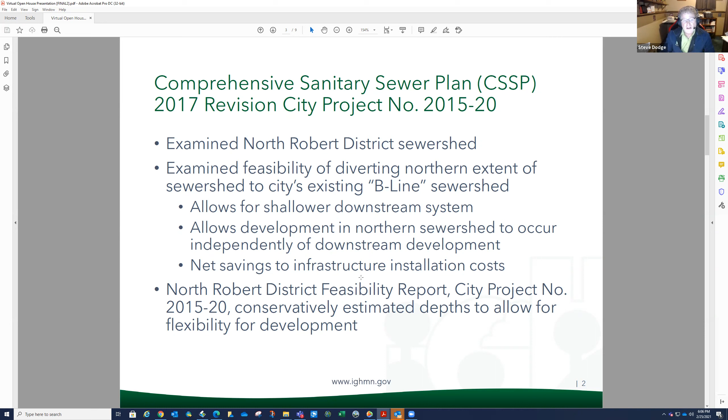So here is the before and after 2017 comprehensive sewer plan. Before, if I take my hand—I'll zoom in a little bit to help with the visual. So we have 70th Street down at the bottom where my hand is. We have Robert Trail on the west side. You can see the sewer before 2017 extended all the way north up to Dickman Lake and in the areas shown here, all the way to Babcock Trail.

After the option B revision of the sewer system, this sends the Dickman Lake area and areas north of 65th Street to the east, connecting to Babcock Trail and the 63rd Street B-line sewer. So it's a different sewer system, and that allowed the area to the south here to be disconnected now, so it can be a shallower system and provide benefit.

Now, this was all done before any finalized development plans were coming into this area, so the depths were very conservative in order to make sure there were future options as development occurs.

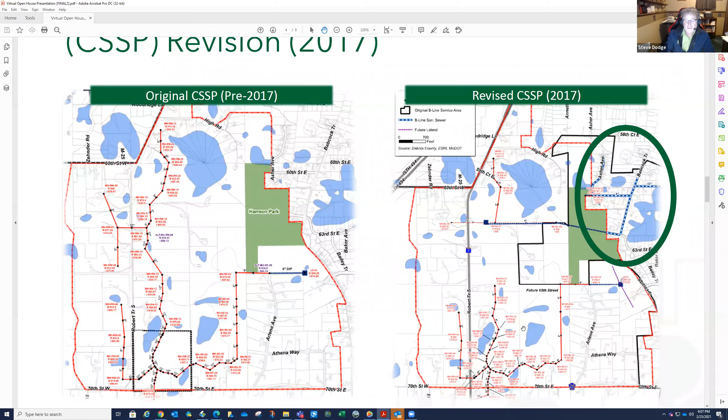Excuse me while I zoom back out. So now we come to this current review—this is a similar map, but zooming in on the southern portion of the maps we just looked at. This is Robert Trail, this is 70th Street, and the yellow down here in the corner is where the roundabout is for Trunk Highway 3, and the gas station is south of here.

But in the northeast quarter here is the Canvas at IGH Development. That's the spur of this review, refinement of the system, because we're starting to get development proposals in, and we can better determine, based on that, what the trunk sewer depths can be.

So I worked with Bolton and Menk, and we put together a technical memorandum based on the submittals we've gotten from Canvas at IGH Development in fall of last year, and presented it to the council on January 25th. They received it, and it acknowledged that we are implementing the 2017 revised CSSP.

That was option B, to send the area north of here to the east to the Babcock Trail area. This area we're looking at now is going to be refined based on current development submittals.

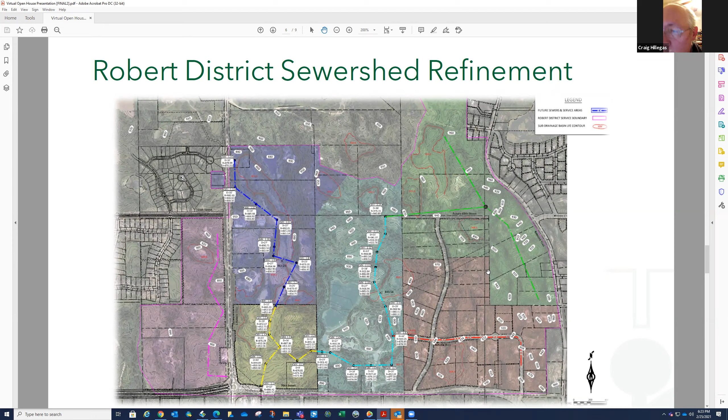I appreciate you guys doing this, understanding this is futuristic, but when you look at the Northwest area, there's a lot of different topologies and variances in land. Not only will you need a lift station where it's shown now in Fee's area, but at the northern end of the pink area on the right-hand side, those properties are way lower than the street and way lower than Babcock. Those last three on the top in the pink would also need one, since those topologies are probably 100 feet below street, maybe a little less.

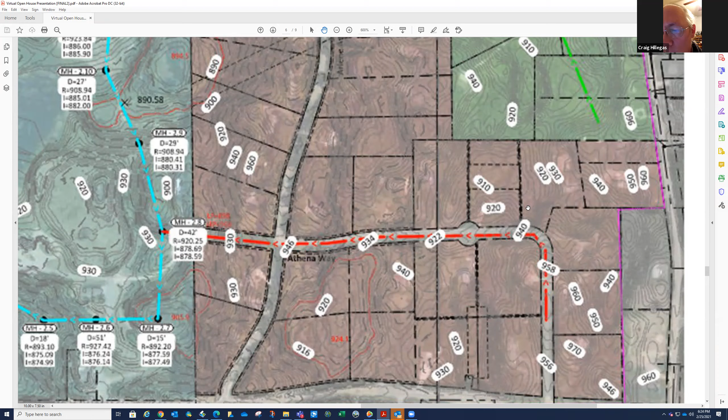The other thing I'm looking at is, I know you need to plan for future development, but in the light blue area you've listed the 79 acres behind us. Do you have development requests for that area? Because at one of the last meetings, Jason mentioned when we were talking about 65th Street that he was very opposed to even putting 65th through, as we know that's something for the future. I'm just wondering, are there current plans for development of that area?

Thank you for your question, Craig, and thanks for participating. I'm very excited that we have the landowner participation we have for this area, because it's really important we get your feedback.

Craig, as far as development goes, Tom Fee mentioned that further north he's developing a single family home unit right up in this area, and he's trying to protect some area, is my understanding. Tom Kaldunsky, the city engineer, mostly worked with Tom in that area. Personally, I'll have to get back to you on any development pressure.

I think you're talking about this green area, Craig, is that the area? No, it's the area between Arlene and Robert, in the light blue sewer line that you have—the old Claddock place, I think. Oh, you're talking about this area, the old Claddock place.

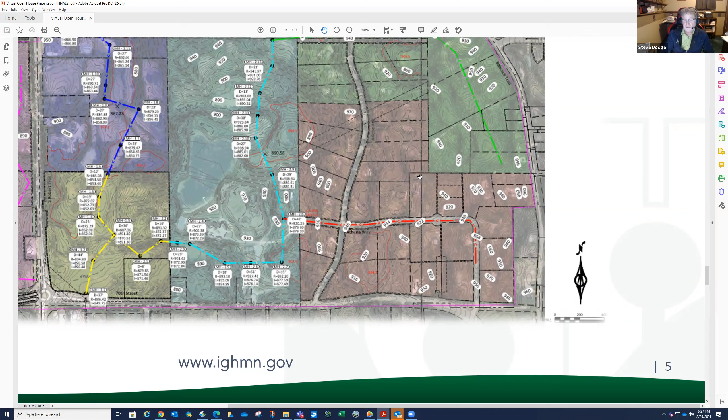Does that answer your questions, Craig? Yes, it does.

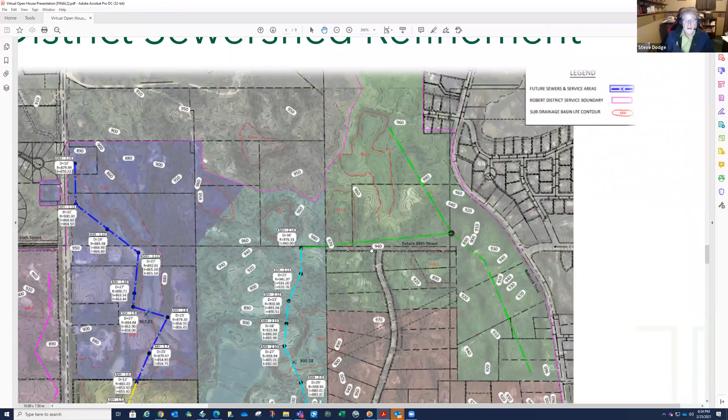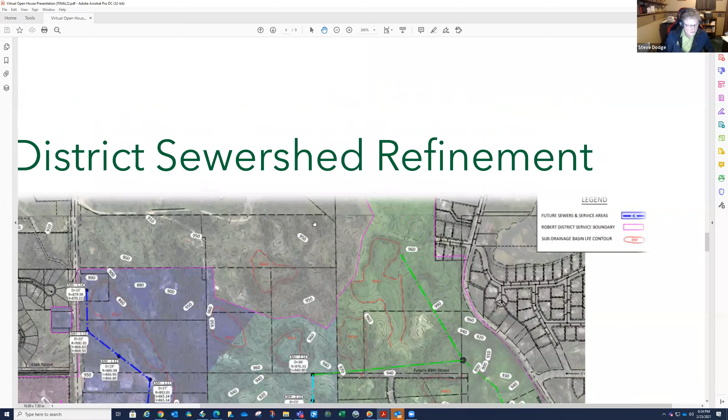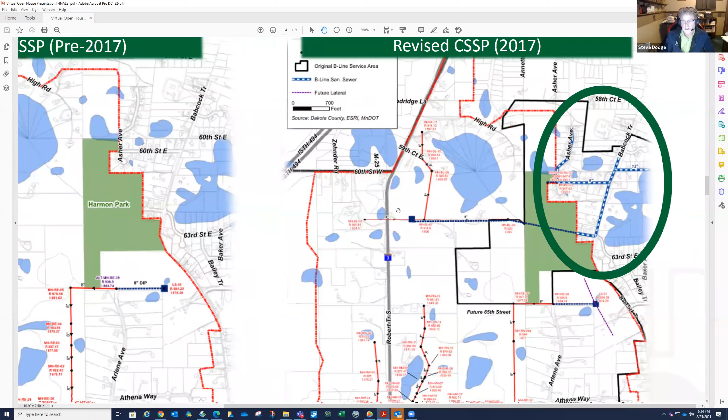Yes, Harmon Park is not to be developed. Let me go back to the prior diagram. Harmon Park is not projected to be developed. The only thing we have is the 65th Street alignment on the very border here that needs to go through, whatever that final alignment looks like, working with the Tom Fee property up here.

For the B line, the northern option is on 58th Court, right off of Babcock down here. There's a cul-de-sac within this big circle here, where my hand is, at 58th Court.

We've already installed a water main that goes across Harmon Park, all the way to Trunk Highway 3, then down Robert, connecting through the current developments of Blackstone through this area, and all the way down to 70th and Egan. This water main is already in because we needed this secondary water main loop to service this whole area. So the water main trunk system is in place now, with feeds from the north and also from the south, going all the way down to 80th Street.

So now the sanitary sewer system would show the same connection point at 63rd Street, but all we would do is bring a shallow force main through Harmon Park, just like we did with the water main, which is only 8 feet deep.

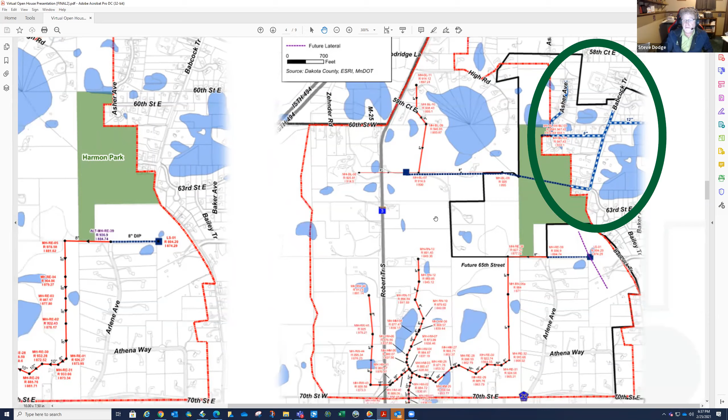So Steve, if I could do a continuance, this is Tom Fee. If you go forward to one of the other maps that showed the line, the green line going through our property, please. I think it's an interesting question posed by Michael, but you're saying that the green line connects through the M&E property, the old Kratitz property, pumping sewer from the southeast to the northwest, and then from east to west. But then there's this line that goes through the center part of our property and dead ends into Harmon Park. Eric and I talked about this a bit, but you have this line going through a park, even though you've already indicated the green line has to go east to west to connect down to Robert and 70th.

Yet you've got this dotted line that dead ends in a park, which creates a question mark around intention when you draw this. Now, I really believe from my conversations with Eric that that's going to go away, but it poses some questions, and it's informative to what you just got done saying about the water lines, which we get. We know that Loch Gregor, which is this 50 acres south of Dickman Lake and north of the Chris property and the Nichols property, is going to go to the B line. But why in the world would you even demonstrate a sewer line going north of a pump station that shouldn't be there in the first place, into the middle of a park? I'm not trying to create some deep scenarios here, but it does.

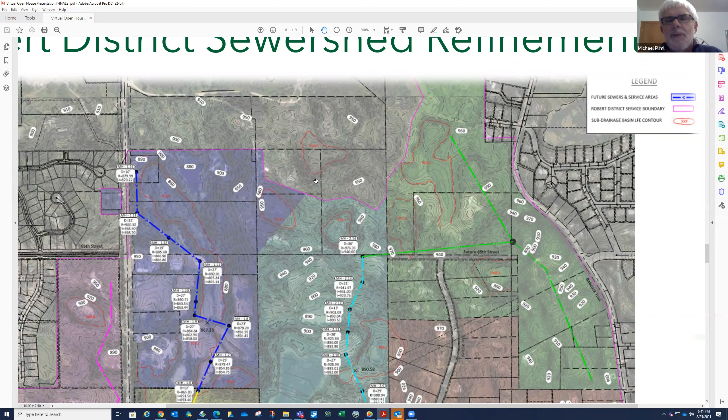Thank you. You bet. Also, Steve, to clarify, is that small property owned by the city across from the golf course going to affect anything in our area on Athena, that red area? They're two separate items. Is that true? That's my understanding, this is Michael Piml asking the question. Yes, that's my understanding, that the Rexigo parcels and the city parcel have the opportunity to be served from the south. Okay, thank you, that's my understanding.

Any other questions?

Yeah, I had another one here in the chat, Steve. Let's see. Oh, it's another question from Michael, but I think we kind of talked about that. I'm on Athena, and I would like a guesstimate on when sewer may be required.

And Steve, it sounded like you kind of answered that it's probably required at a time when it's petitioned by the residents. Yeah, we're not requiring this. Yeah, exactly.

All right. Are there any other questions? This has been a good conversation. There are some revisions that are going to come out of this open house meeting, which is the point behind having them, to do some further refinement of the diagrams. So showing without conflict, that's the main thing. The Harmon Park is a really good example. So those are the kind of things we'll shake out when we show lines on paper. So I appreciate everyone's feedback. Thank you for holding the meeting.

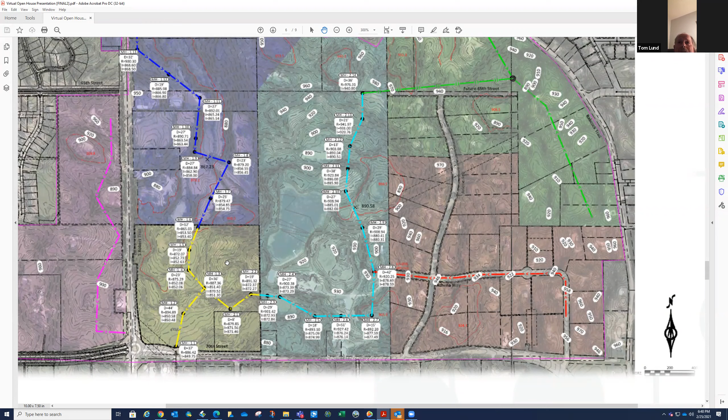Yeah, Steve, I appreciate that, and Eric, the same thing. But I'm just kind of shocked by it. And sometimes, no offense, but I think sometimes the city doesn't offer this because I really believe this sometimes - it's like you're not offering it because you're keeping the residents in the dark. I really do feel that way sometimes. Not saying that's the case, but I do feel that way at times, because there's so much, like these numbers that you guys present on this what we're talking about.

I already explained it. Who in the heck can understand? You start off with the top one, M. What is it? I can't. It's even hard to read because it's so small. And I've questioned that too.

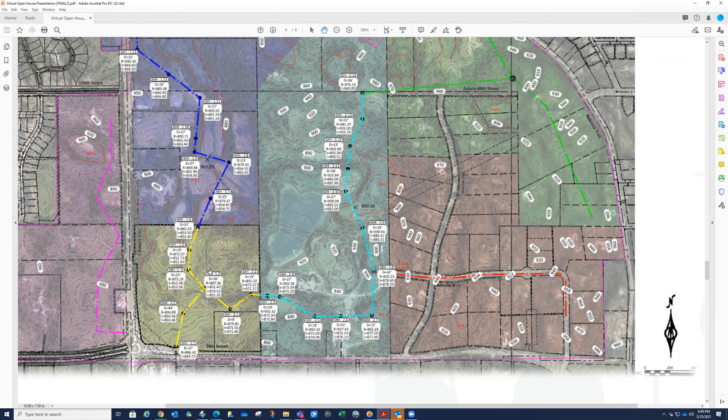Hey, Tom, I do appreciate your comments, and I think Eric and I get what you're saying. Just to keep the meeting short and concise, and because it's recorded, I want to offer to meet with you separately with Eric and I, if you want to spell out more concise issues you want us to address. We can definitely meet separately and address further concerns, but I definitely got your legend point and agree with you on that.

Are there any other items you wanted to bring up, Tom? No, because I talked to Tom Kadowski this afternoon, and he pretty much covered everything. And on top of it, I've got a meeting with him tomorrow afternoon.

Okay, I'll give him... really appreciate you checking in though, and providing your comments. So thank you for that. Yeah, you're welcome.

I think a lot of us, you had thrown out some informational items, and for right now, only the northeast area of 70th and Robert Street is designed for development at present, and the one just to the north of it and the one just to the east of it are likely the potential next developments that will occur. Is that what I'm reading?

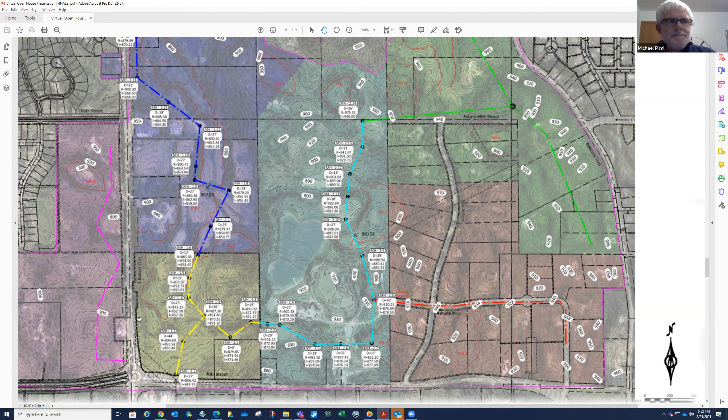So that's one of the closer developments coming behind Canvas. Does that answer your question, Michael? You bet. Any other questions? This has been a very good conversation, everybody. I really appreciate your participation.

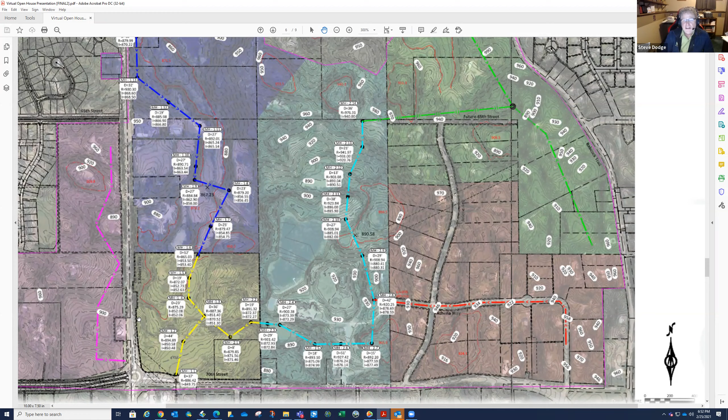Hey Eric and Steve, this is Richard Whalen from Arlene Avenue. I just had a question regarding the open house invitational we received. There was a comment made about how the sewer lines were going to be able to be shallowed, 10 or 15 feet more, than it was originally anticipated. So I was curious how did that assessment of being able to shallow them further come up? Was there some kind of study done? Was there some kind of mapping done? What can you tell me?

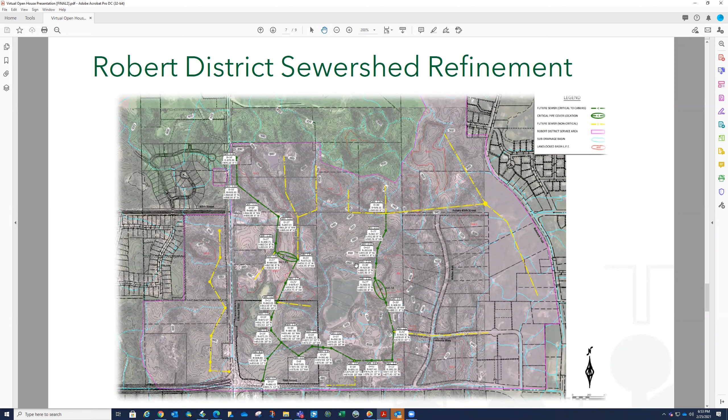Yeah, Richard, thanks for your comments. What happened was the Canvas development in the northeast corner of the roundabout that just went in at 70th and Robert — that's the new Canvas development. The preliminary plat's already been approved by council. Final plat has already gone to planning commission, so we're in the final stages of getting this approved through council. Since fall till now, we've been working with that development.

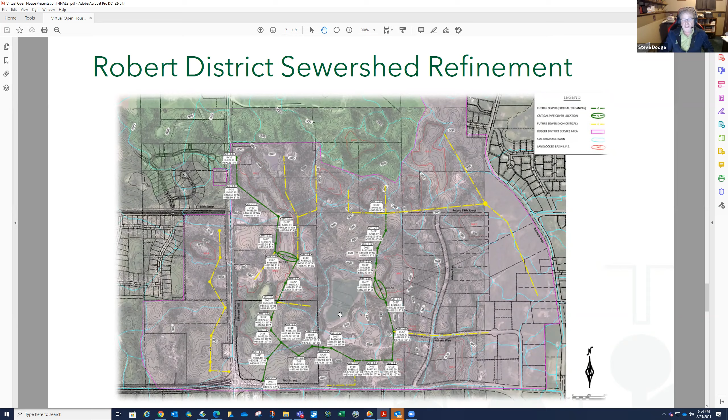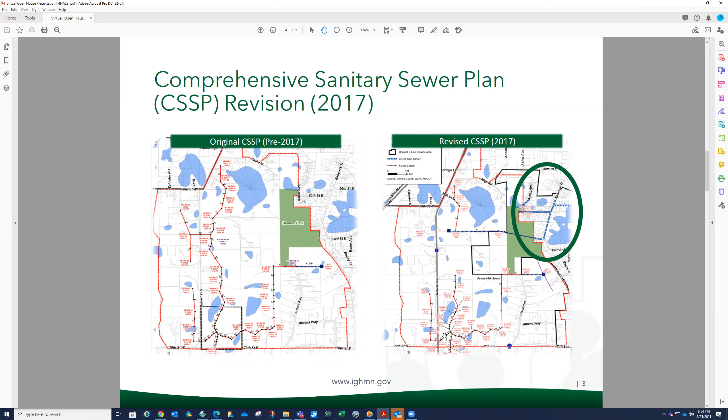And what we decided to do was go back to what was a 2017 feasibility study, looking at this from a 30,000 foot level, where they said, okay, we're going to keep all these sewers deep enough to work with developers as things occur in the future. Well, when Canvas came in, everything goes through Canvas — that's the starting point of all this sewer north of 70th Street, so they're the triggering point basically. So we took the triggering point and went back to the yellow area, that's Canvas, and we said, you know what...

The feasibility study in 2017 was a plan. Now we need to refine the plan based on Canvas's submittal, their type of buildings they're putting in, their grades, their basement depths, and everything.

And then we looked at the upstream properties and followed very closely the Northwest Area Stormwater Management Plan in order to understand low floor elevations that could be developed in the area in accordance with regional basins and low points. And we refined everything outside of Canvas slightly too to make sure that you could get served.

So in order to lower things at Canvas, we had to backtrack. We had to first look north and east of Canvas and make sure we can service all those properties. By doing that, we determined there are two circle areas, one on the Cladic property, one on the Lund property. Those two are the pinch point areas that keep these depths where they need to be, one going east and one going north.

So we've just refined the bigger comprehensive plan based on where the alignment of the sewer is going through Canvas. Because now we have an actual development plan with Canvas, we know exactly where the sewer is going to come through the Lund property and through the Cladic property. Now we can better determine the sewer depths, and that allowed a 10 to 14 foot shallowing of the sewers, which is a benefit to development overall.

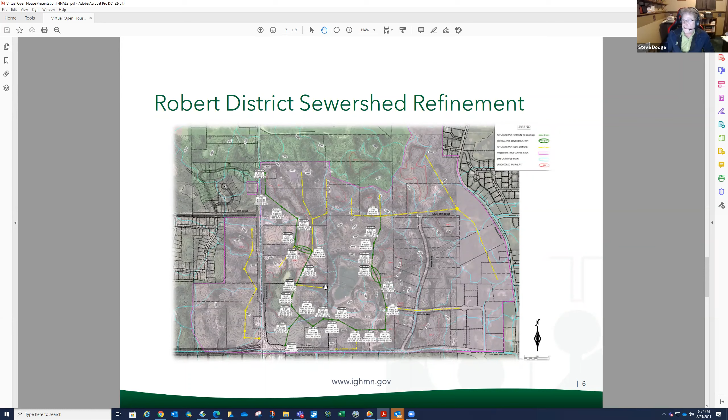So kind of what happens, Richard, is when the city receives a preliminary plat submittal, it includes engineered drawings, including sewer. And since the sewer in this case has to go through Canvas and then serve additional properties, the developer's engineer will ask the city what elevation they need to end the sewer at along their property line to serve additional properties. Once that question is asked, it's the city's responsibility to look at the sewer on the property line of Canvas and then look upstream to see exactly what elevation that sewer needs to be set at. So that's what spurred this refinement look, so we could provide sound information to the developer's engineer for the sewers at their property line.

Okay, great, thank you.